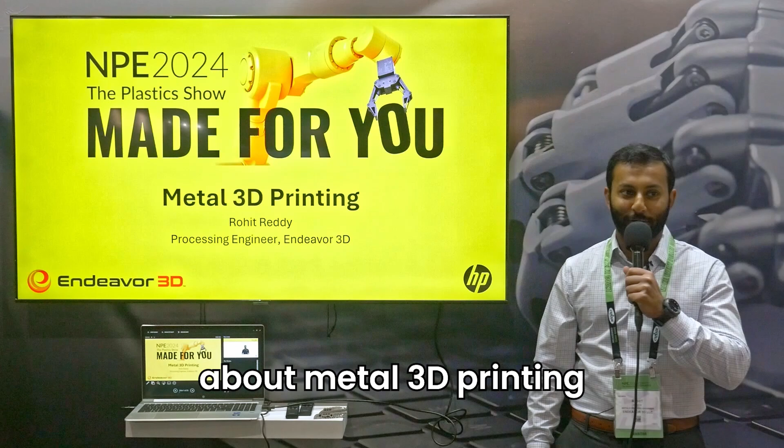I am Rohit Reddy, a process engineer in the metals group at Endeavor 3D. I have about 4 years of experience in additive manufacturing. I started my career at HP, where I was working on sinter process and new material development.

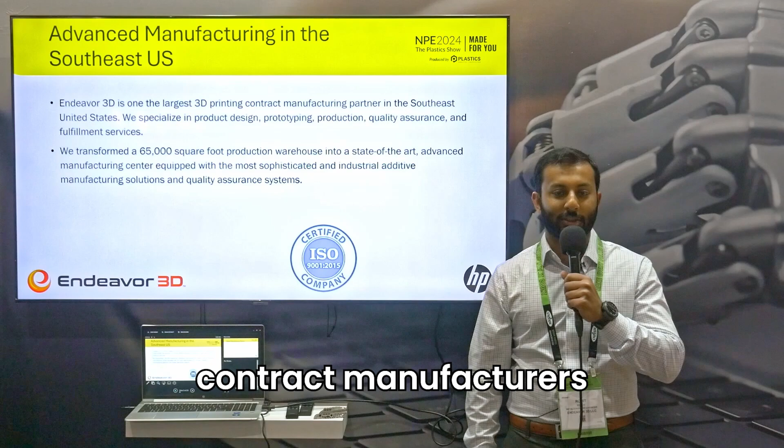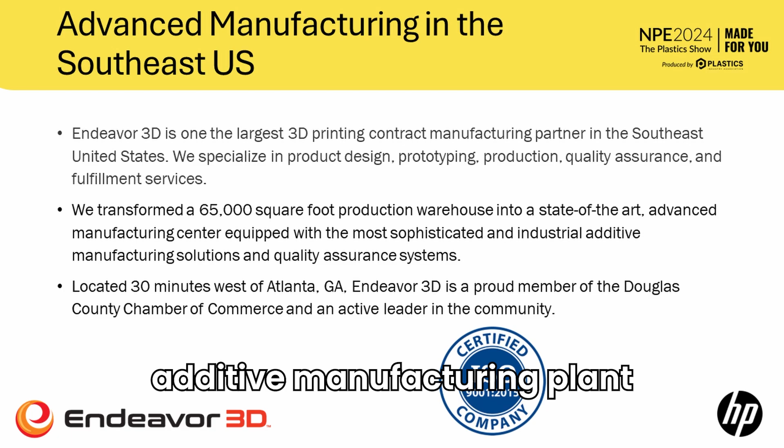A little bit about Endeavor 3D: we're one of the largest contract manufacturers in the southeastern United States. We started with a blank slate and transformed a 65,000 square foot facility into a state-of-the-art additive manufacturing plant. We specialize in the full range of services, from product design and prototyping to full-scale production and fulfillment services.

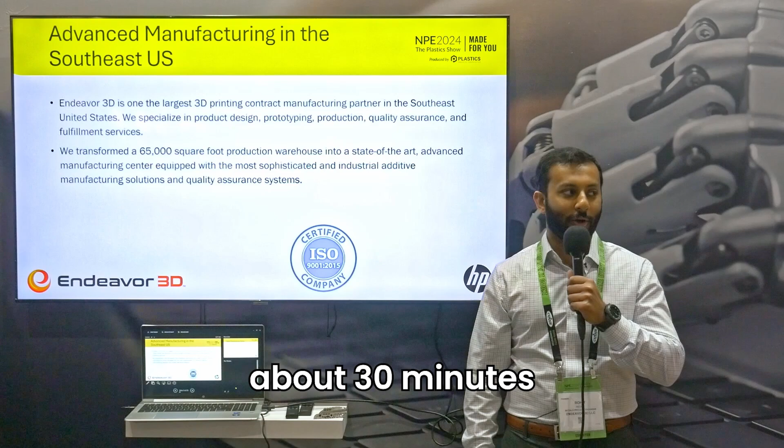We are ISO certified, and we are also ITAR listed, located about 30 minutes west of Atlanta, Georgia. Endeavor 3D is also proud to announce that we are one of a handful of companies in North America that are part of HP's Digital Manufacturing Partner Network.

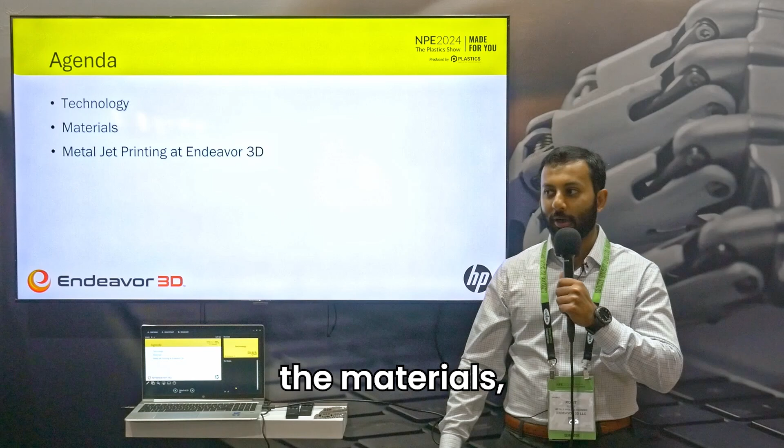This indicates that we have passed a series of on-site inspections that show we are prepared to provide a best-in-class product with 3D printing. In this presentation, we are going to go over the technology, the materials, and how metal jet printing fits in at Endeavor 3D. So what is metal jetting?

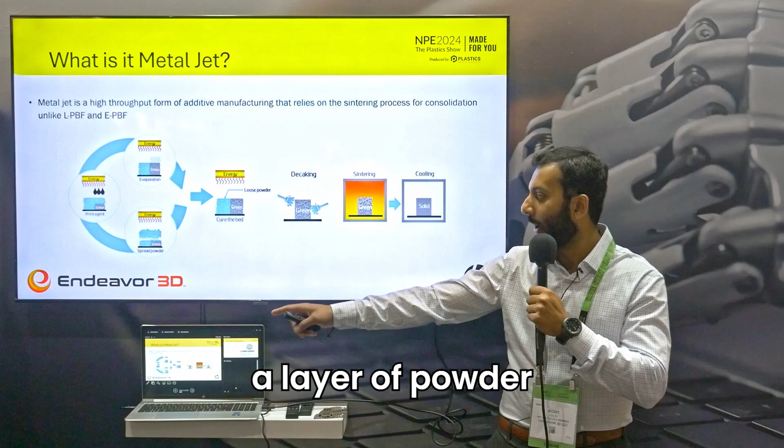Metal jetting is a high-throughput form of additive manufacturing that relies on sintering for the final part consolidation process. Similar to laser powder bed fusion, we're using a layer-by-layer process. In our machine, we're spreading a layer of powder, but instead of applying heat or a laser directly to the print bed, we are applying a binding agent.

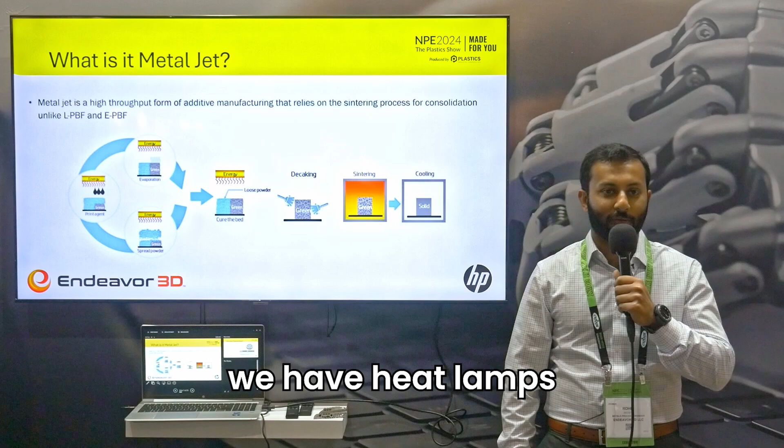Once the binding agent is put down, we have heat lamps that evaporate water and other components out of the binder so that we're not bleeding into the next layer, and the process continues.

We spread another layer of powder, we spread another layer of binding agent. Once we have laid down enough layers for the part to be completed, we go through a curing process so the polymer-based binder can set.

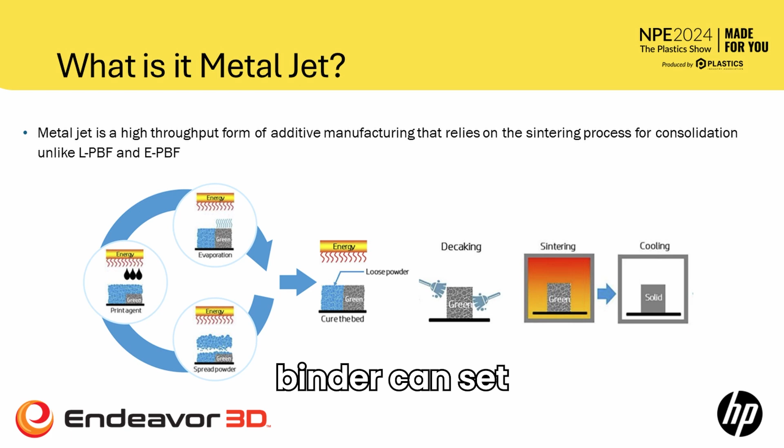Once the curing process is complete, the parts are strong enough to handle, so we retrieve the parts out of the powder bed, clean them off through a decaking process, and the parts are loaded into a sintering furnace for the final consolidation process.

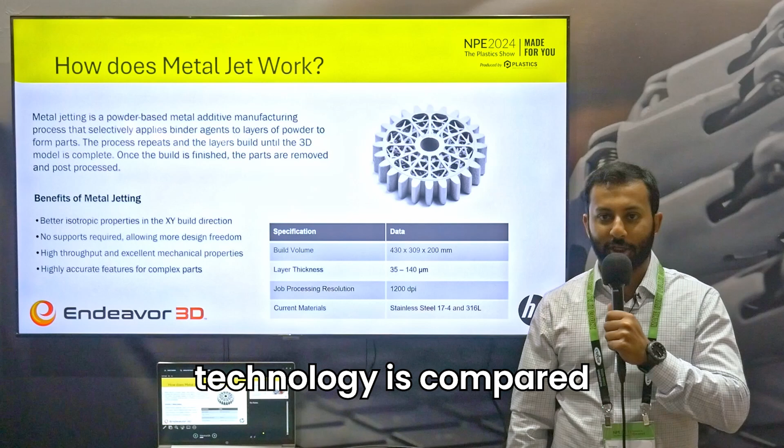The benefits of metal jet technology: compared to other technologies, we are seeing better isotropic properties in the X and Y direction.

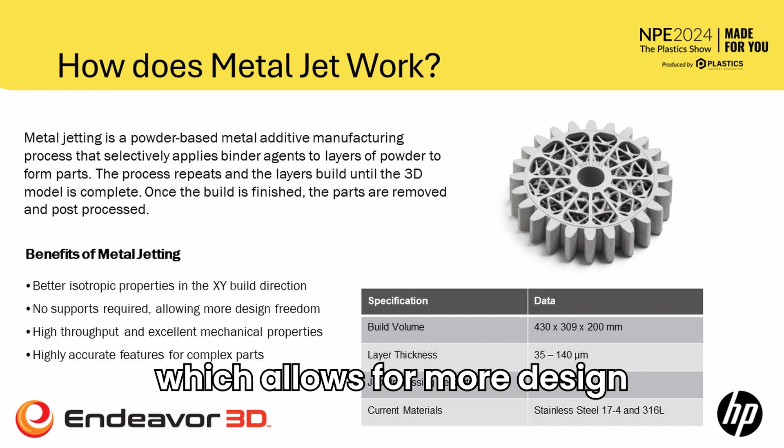Due to the fact that we are not providing heat directly into the print bed, we have no need for supports or tooling, which allows for more design freedom. Given the fact that we're using a binder-based process, we have the ability to print more complex parts.

So what are the design advantages of using metal jet technology? As we can see here, due to the fact that we don't have a need for molds or tooling, we can print very complex geometries.

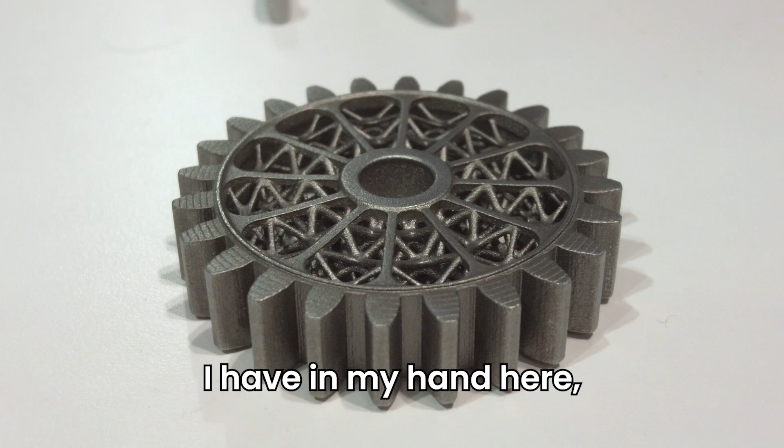This gear part I have in my hand here, the way it is built with the lattice structure, this cannot be made with CNC or traditional manufacturing. This part is not only lighter than the original part, but it still matches the required specifications for this gear to be used.

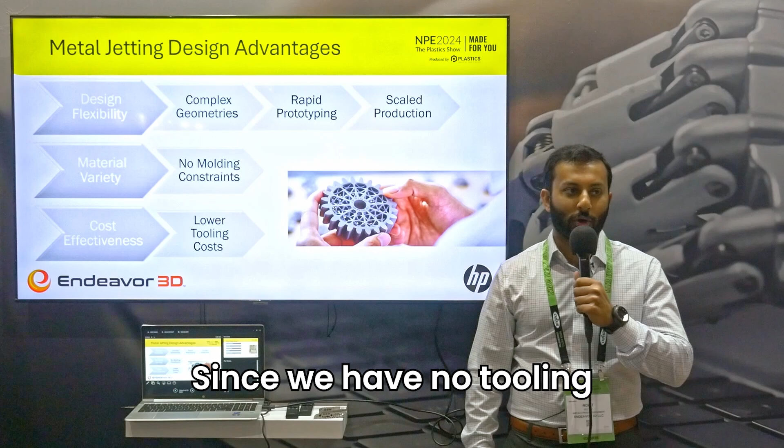Since we have no tooling requirements, we can move very quickly. Once we receive the part file, we can have the parts printed in a number of days.

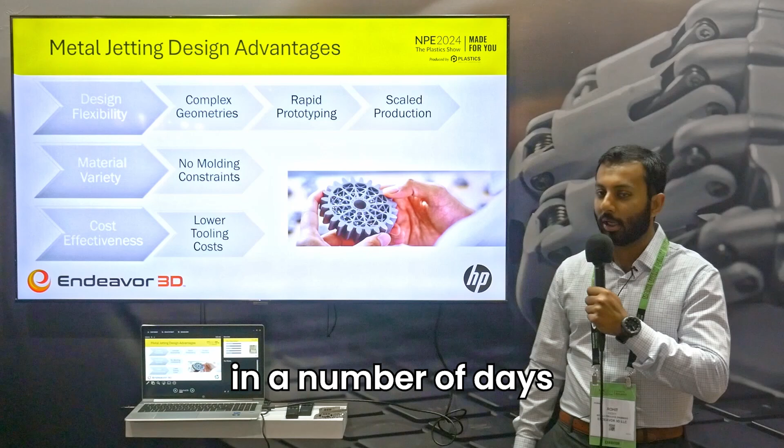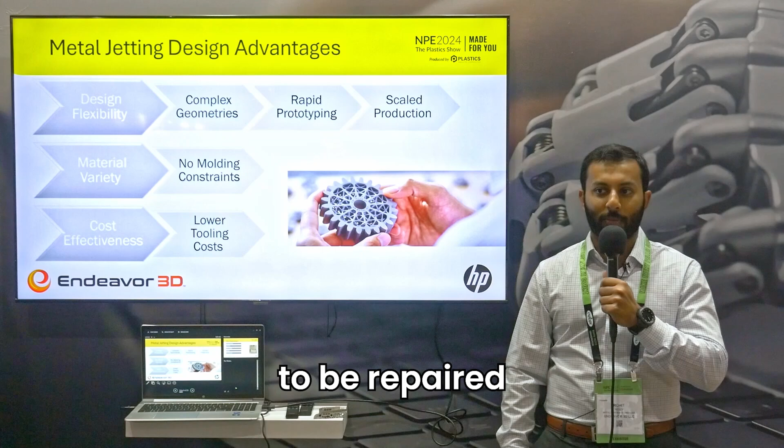An example I like to give is we were working with a tier 1 automotive supplier that had a manufacturing process go down because a fixture needed to be repaired. We received the files on a Tuesday, and we were able to have the part in their hand on Friday, and they were able to resume production.

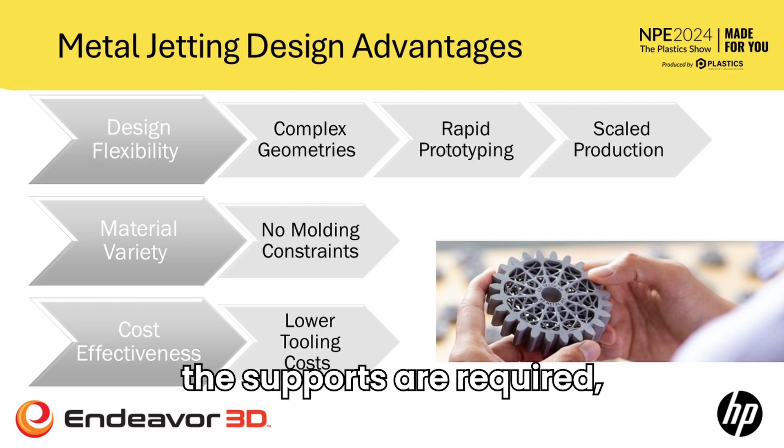Once we have the prototype done, as we're making that prototype, we're also developing the specific process for that part, so we can move on to full-scale production very quickly. An additional advantage of binder jet is, since supports aren't required, we utilize the full build box, so we can print in multiple layers, and we can use the full X and Y space of the build bed.

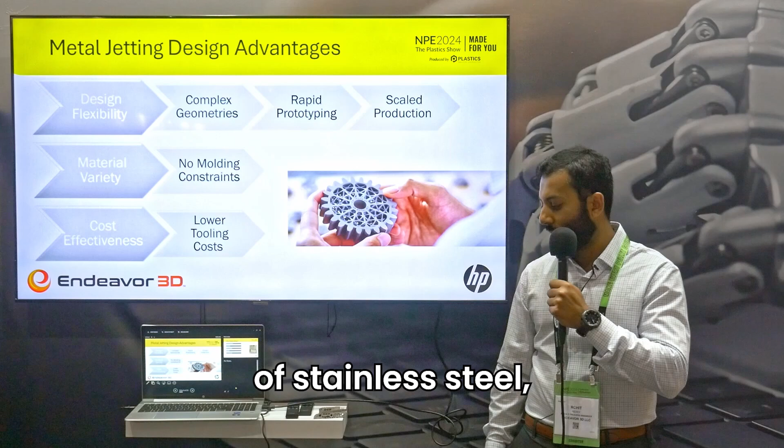At Endeavor 3D, we are currently printing in 2 different grades of stainless steel, but with binder jet technology, there are a number of materials available to use, as long as they're compatible with the sintering process. Due to the lack of tooling required, we can be very cost competitive, and we can move quickly as well, so we're able to get you back into production.

So why metal jetting? All around the world, we're seeing a big push to increase efficiency and a big push for electric vehicles. Due to the unique features you're able to print with binder jet, we can create lighter parts that still serve the same purpose. This increases efficiency, increases electric vehicle range, and can reduce fuel consumption.

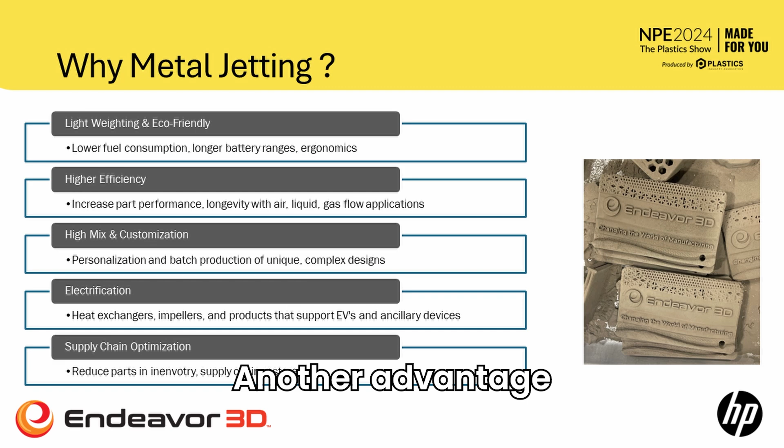Another advantage to metal jet technology is we can print multiple parts within the same build box, which allows for a high mix, and we can customize parts very easily.

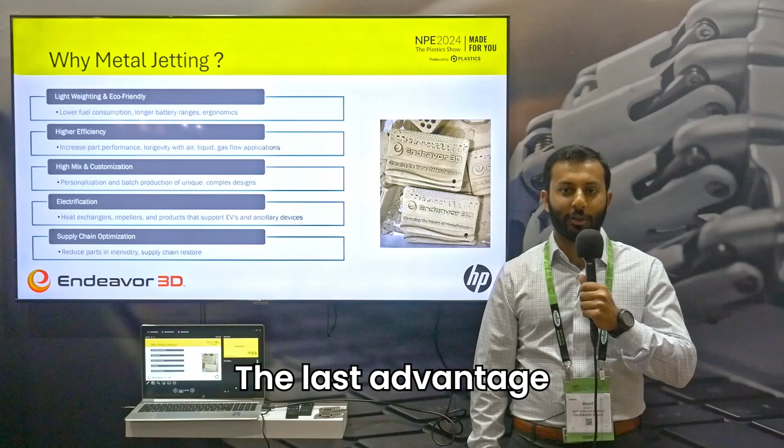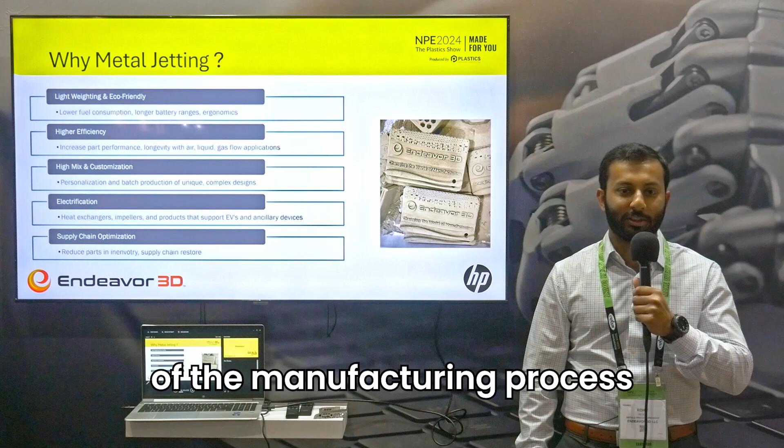The last advantage we'll cover today is supply chain. With metal jet technology, we're only relying on the precursor powdered material. From there, we can cut out a big part of the manufacturing process. As we mentioned before, we have no tooling requirements, and we can move very quickly from CAD file to a printed part.

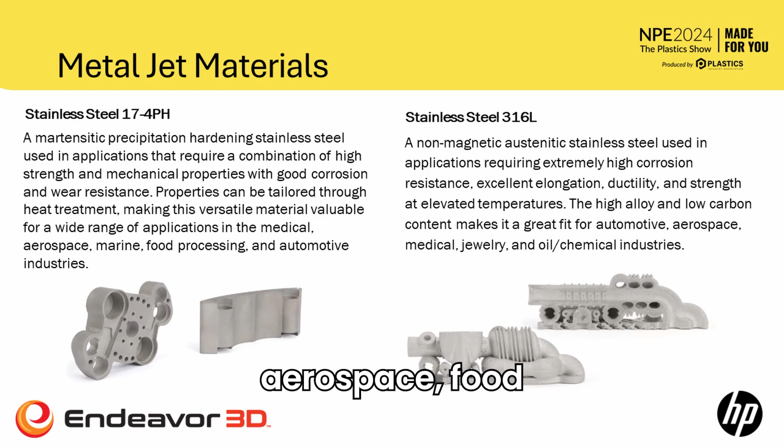We currently offer 2 different grades of stainless steel, the first being 17-4PH material. This is a martensitic precipitation hardening stainless steel that offers a good combination of high strength and mechanical properties with good corrosion and wear resistance. This makes the material applicable in a number of different industries, including automotive, aerospace, and food processing. 17-4 is used in many spaces as a structural material.

In the food processing space, due to its high strength and wear resistance, 17-4 can be used in parts that may need to move or spin quickly.

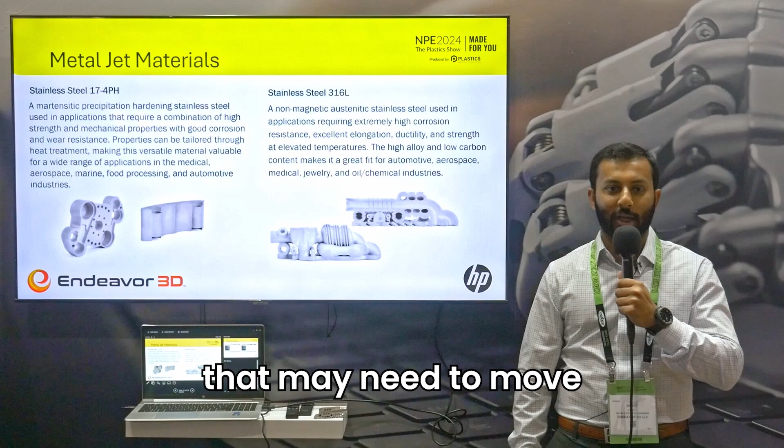The second material we offer is 316 stainless steel. This is a low carbon austenitic stainless steel that offers very good corrosion resistance, good mechanical properties, with very high elongation. Different from 17-4PH, this is good in corrosive environments, in applications where the material is going to be in contact with fluid, oil and gas.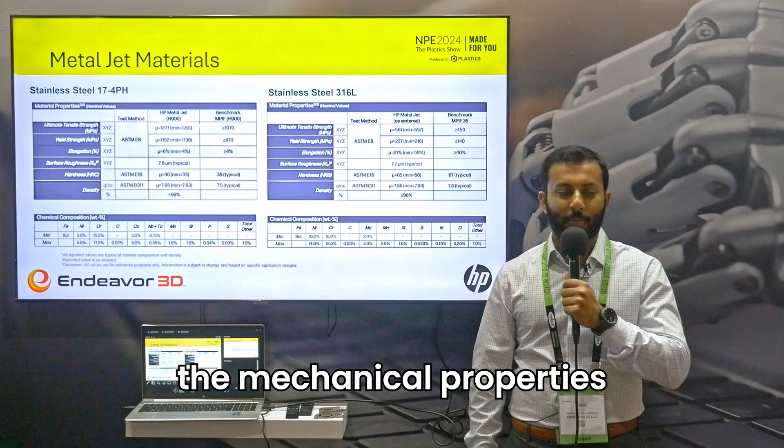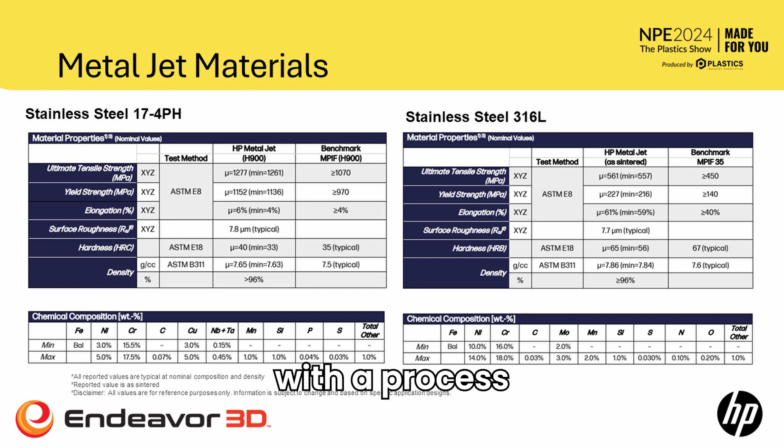We test all of our materials in-house according to ASTM standards. As you can see in the chart, with a process we've developed with HP, we're consistently meeting or exceeding MPIF standards. In the top lines of the chart, you can see the big differences between our 2 stainless steels.

17-4 has a much higher tensile strength and yield strength than 316L. This makes 17-4 more useful in structural applications, but as you can see, the elongation for 316 is much higher. As mentioned before, 316 is more useful in corrosive environments, and in applications where the material is going to be loaded and unloaded many times.

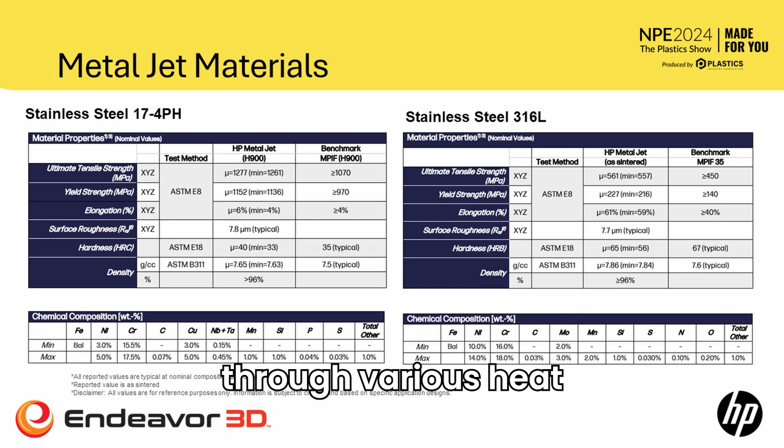Moving down in the chart, we can also see that 17-4 is a much harder material than 316. The 17-4 properties can be tailored to meet your specifications through various heat treatment processes, but this high hardness makes 17-4 a good application for molds.

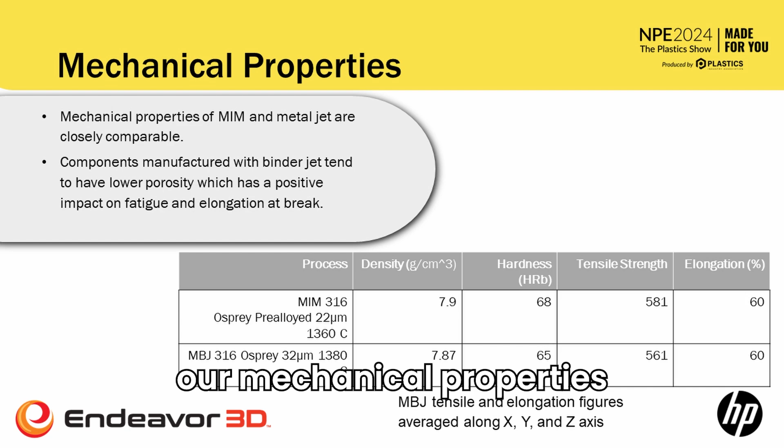Metal jetting is commonly compared to MIM, or metal injection molding. Taking a look at our 316 material, we can see that our mechanical properties and density are very closely matched to MIM. Looking at the tolerances between metal injection molding and metal jetting, metal injection molding typically sees deviation from nominal of plus or minus 0.3%.

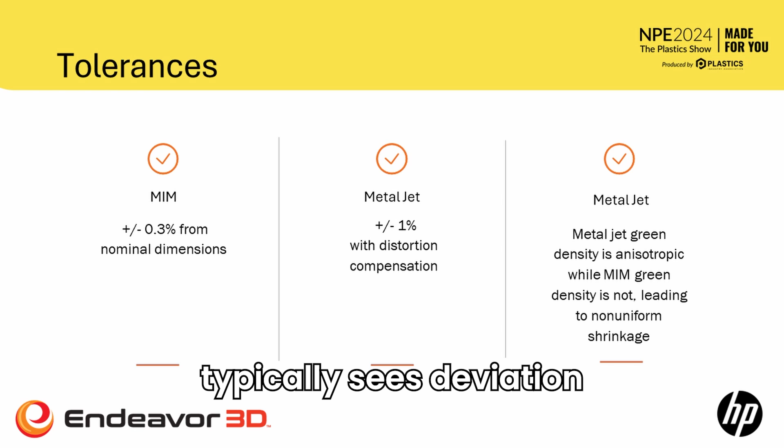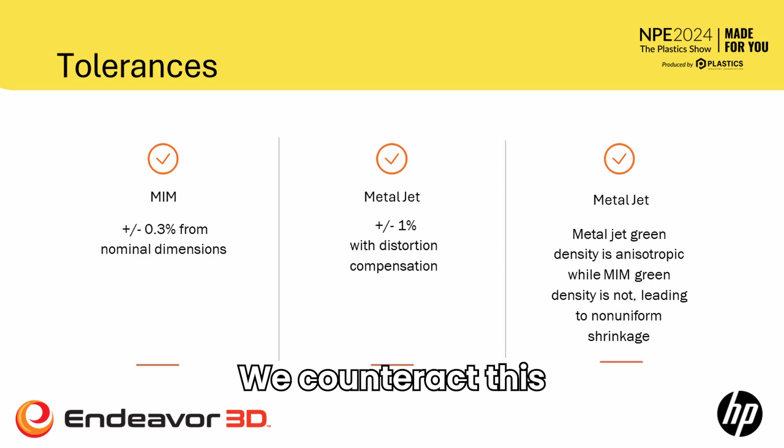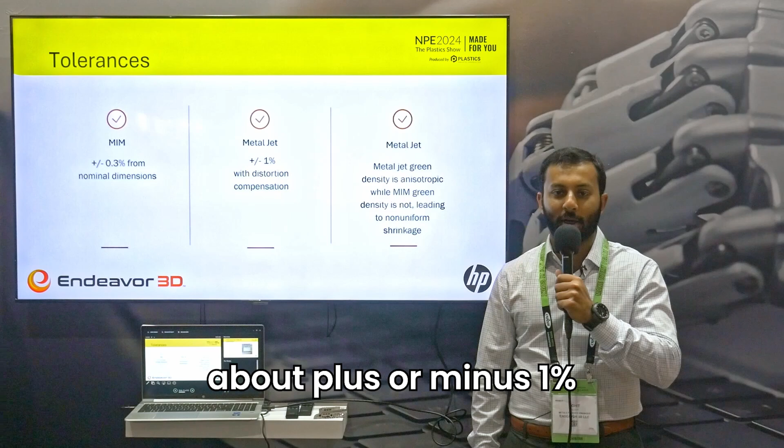With metal jetting, we have the additional challenge of non-uniform shrinkage in the X and Y direction. We counteract this through design optimization for additive manufacturing, as well as using sintering simulation software. We typically see deviations from nominal of about plus or minus 1%, but with a well-designed application, we've seen under 0.5% as well.

So what are the common metal jet applications? First and foremost, metal jetting can be used as an alternative for casting.

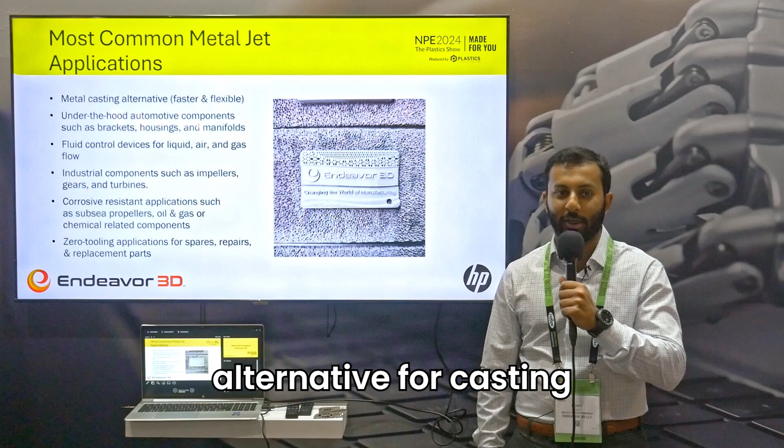We have no tooling requirements, so there's very little development time that needs to go into metal jetting. Once we receive the file, we'll take a look, and if any design changes need to be made, we will work through that process with you.

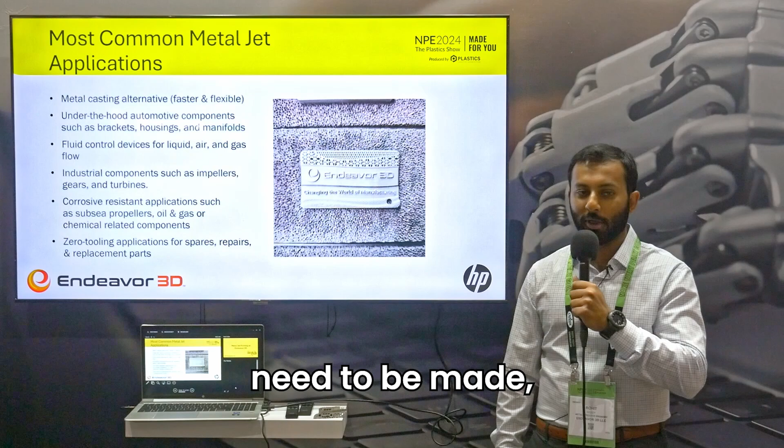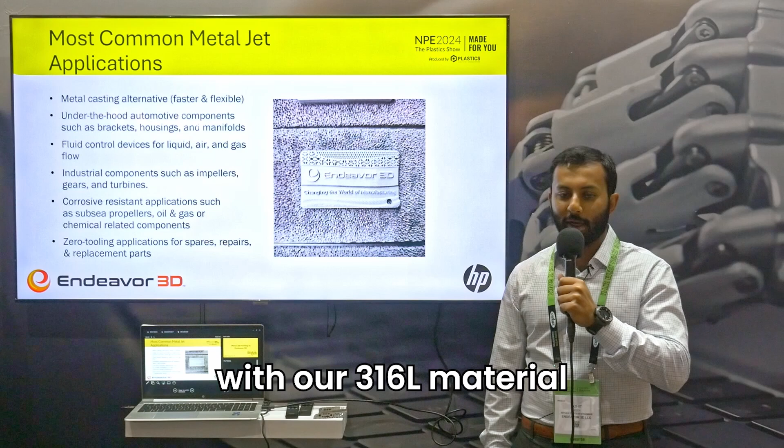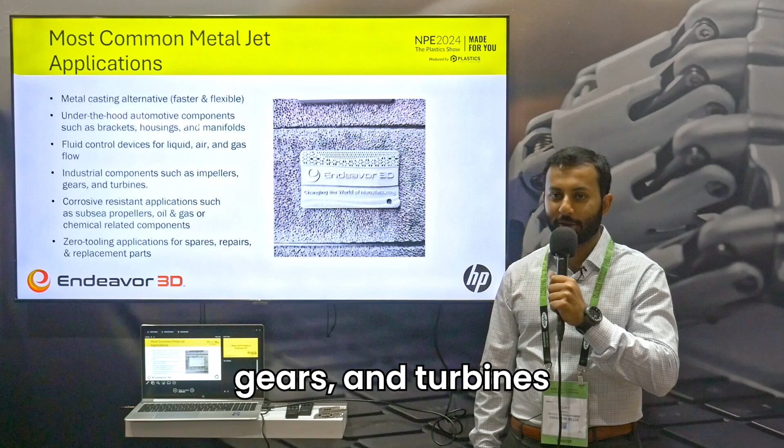There are many use cases in the automotive industry, so we can make components for brackets, housings, manifolds, many components used under the hood of a car. With our 316L material, it's highly corrosion resistant, so it's very useful in fluid handling devices for liquid, air, and gas. Industrial components such as impellers, gears, and turbines are traditionally manufactured with casting and have to be machined.

Another big advantage of 3D printing is because we can move and scale very quickly, parts need to be repaired, tools need to be fixed, we can print jigs and fixtures very quickly.

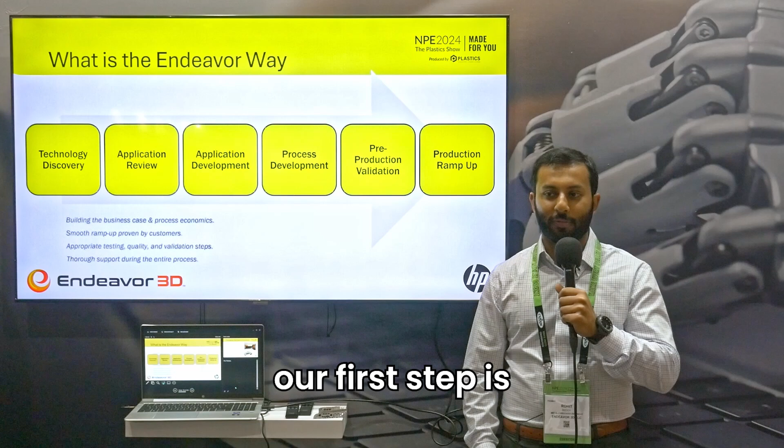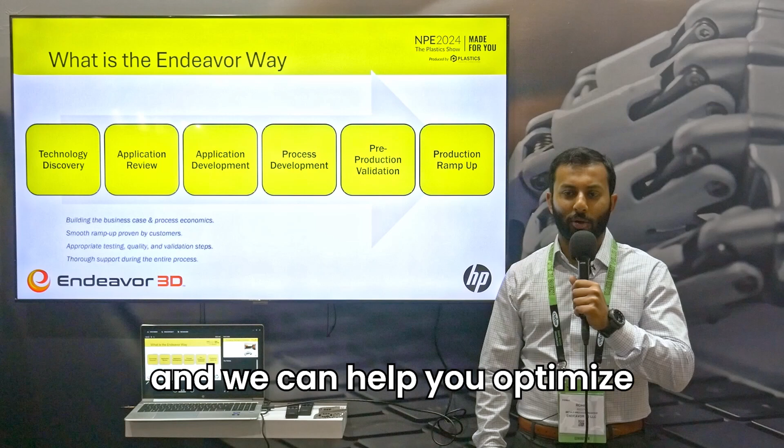So how does metal jet 3D printing fit in at Endeavor 3D? Our first step is technology discovery. We'll either work with you to identify a part that is currently manufactured using a different technology, and we can help you optimize the design to be used with metal jetting, or we can start from the ground up with a brand new project optimized for the metal jetting process. Our engineers will review the application and work with you to determine if our material will meet your specifications and any changes that need to be made.

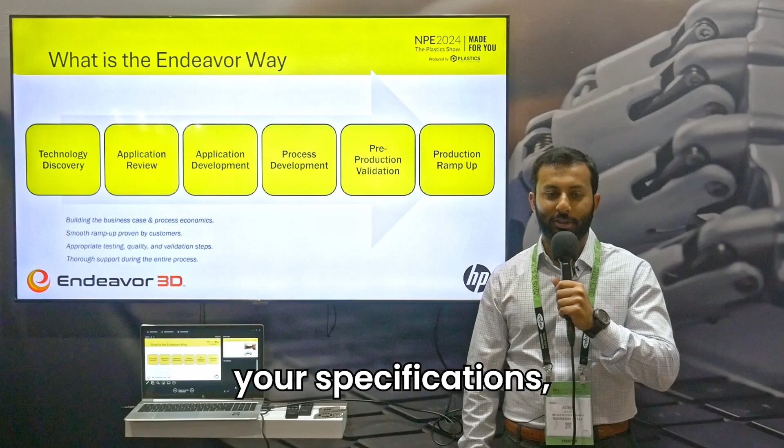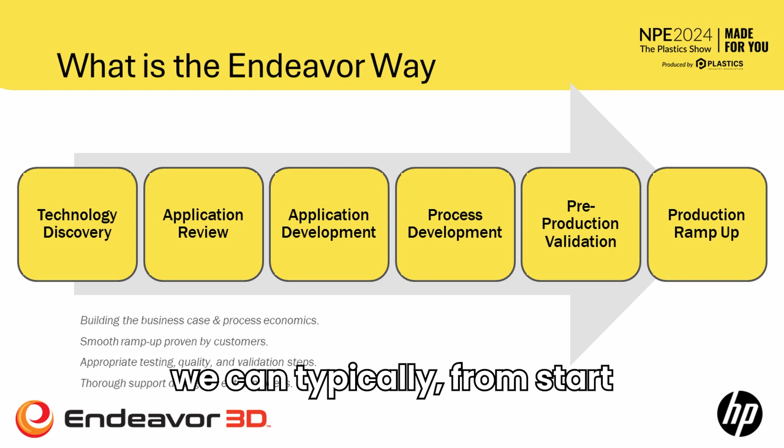Once the application is determined, we'll move on to the prototyping phase, and in conjunction with prototyping, we'll also develop the unique process that may need to be developed for that specific part. Once we validate that the prototype works, again, because we have no tooling, we can utilize the full build space and move quickly into full-scale production. With this process, from start to finish on a project, we can typically send you your parts in 5 to 7 business days.

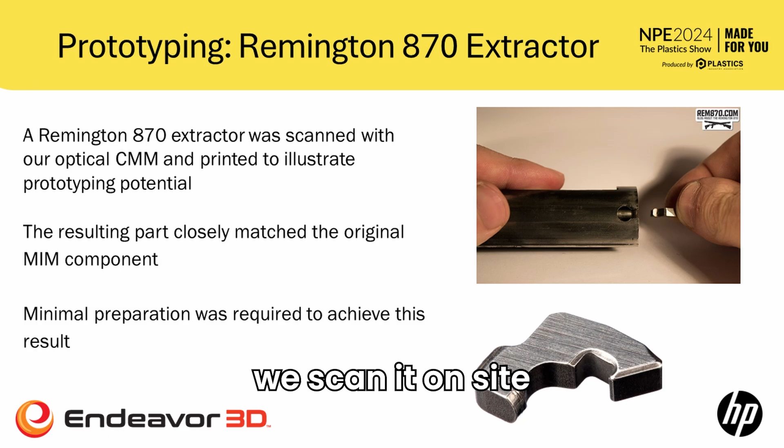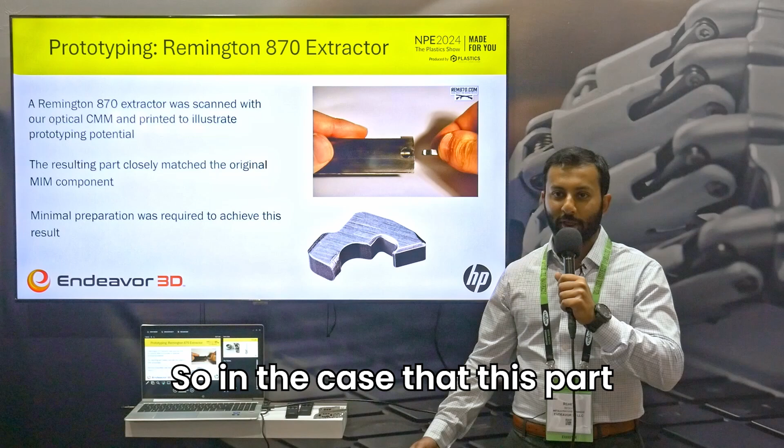This part is a case study we recently did. This is a Remington 870 extractor that is traditionally manufactured using MIM technology. Using this part, we scanned it on site with our optical CMM scanner. We were able to print this part on our metal jet printer, and we were able to match the results of the MIM part very closely. So in the case that this part went out of production or you were unable to find the part, we would be able to reverse engineer it and print it within just a couple of days.

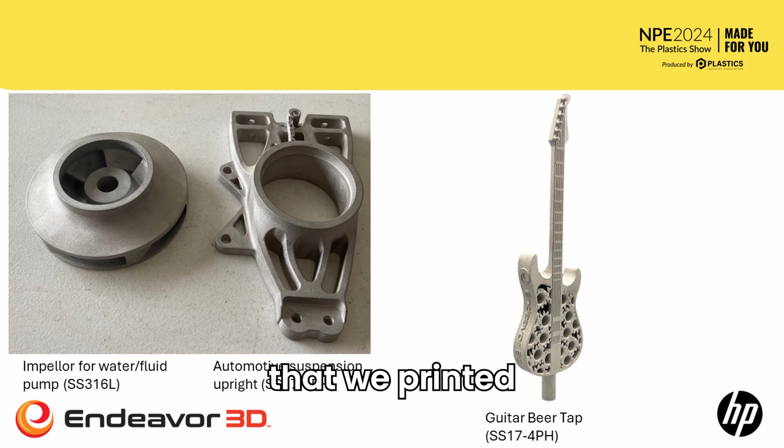Here are a few parts that we have printed at Endeavor 3D. On the far left, you can see an impeller that we printed with 316L material. Normally this part would have to be cast and then machined, but we were able to print it and sinter it in one piece as is. This would be a great use in fluid handling applications, in a water pump, oil and gas, anywhere the part would be touching liquid or a corrosive environment.

The part to the right of that is a suspension upright that was printed in 17-4 PH material. Again, this part would traditionally be cast. We were able to modify the design with cutouts and unique features so that it is lighter than the original part, but it still matches the original specifications.

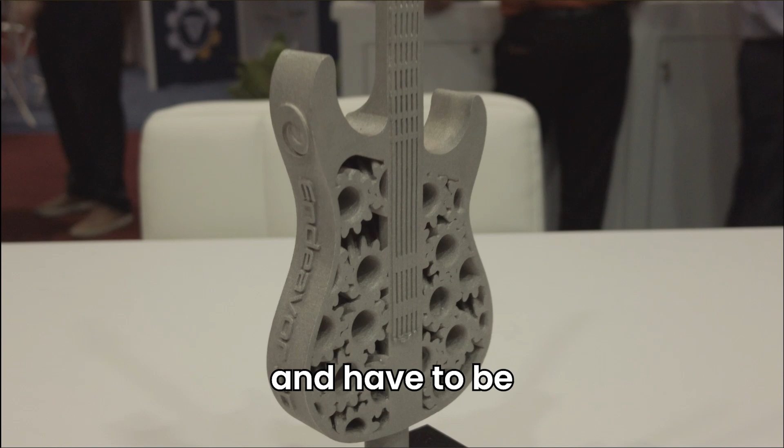The part on the right was a piece we did to showcase our technology. This part may traditionally be made in a number of pieces and have to be assembled together. We were able to print it in one continuous piece, and it also showcases strings on the part that are less than 1 millimeter each in diameter, showing the fine features we were able to achieve using this technology.

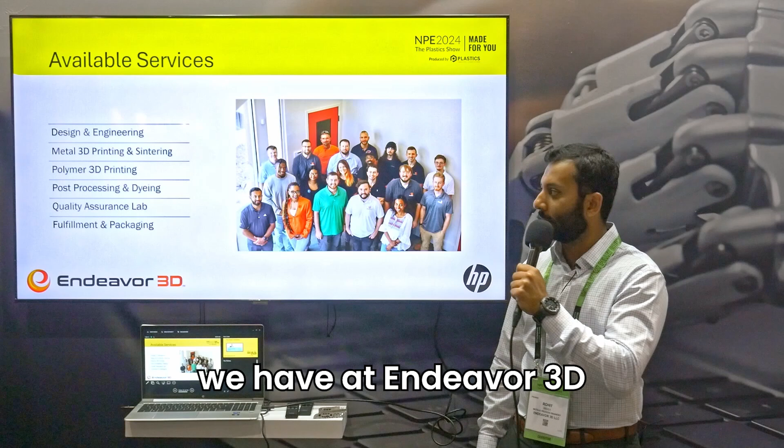So the available services we have at Endeavor 3D are design engineering, metal 3D printing and sintering, polymer 3D printing, post-processing and dyeing, a full range of testing in our quality assurance lab, and fulfillment and packaging as well. Thank you.